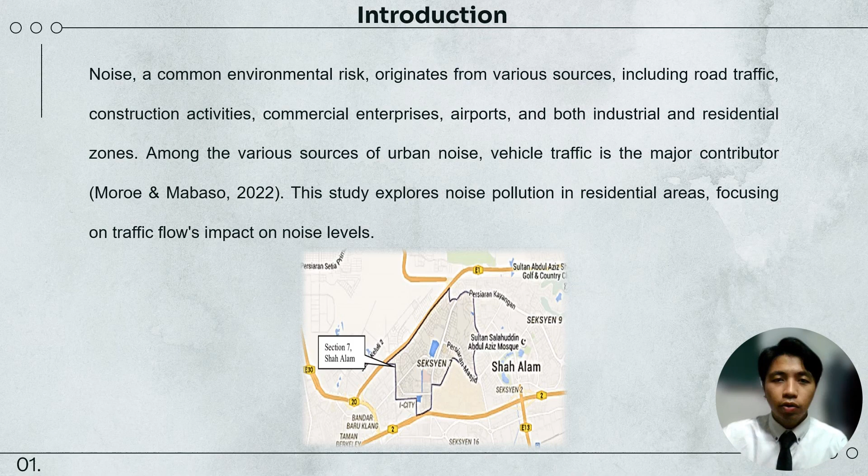This is the problem statement for this study. First, excessive noise in residential areas significantly impacts residents' well-being and quality of life. Road traffic is identified as a major contributor to environmental noise, involving complex factors like engine noise and tire-road interaction.

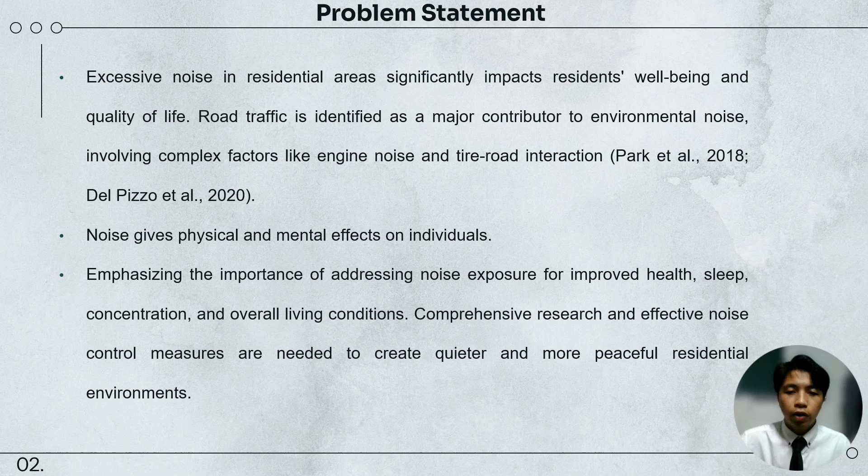Secondly, noise gives physical and mental effects on individuals. And lastly, emphasizing the importance of addressing noise exposures for improved health, sleep, concentration, and overall living conditions. Comprehensive research and effective noise control measures are needed to create quieter and more peaceful residential environments.

These are the objectives to achieve in this study. Firstly, to determine the noise level in residential area Seksyen 7 Shah Alam. Secondly, to identify the traffic volume and traffic composition during peak hours at the selected location. Thirdly, to analyze the relationship between traffic volume and noise level in the residential areas.

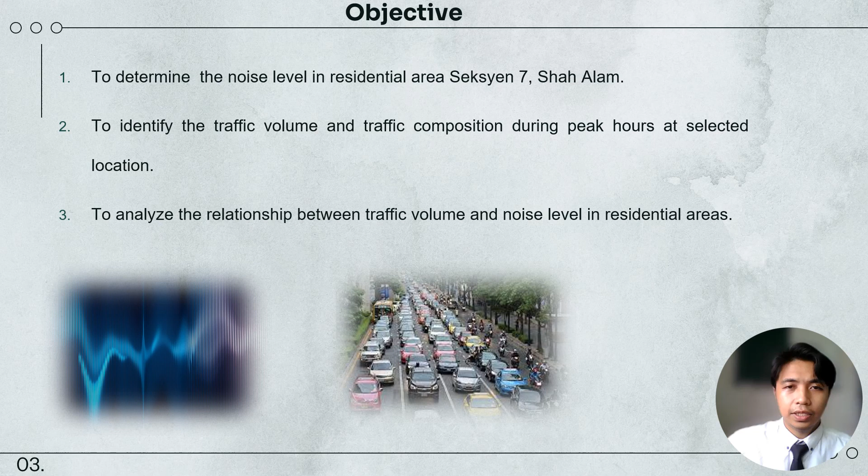There are three crucial research questions for this study, which are: how to determine the noise level in residential area Seksyen 7 Shah Alam? Next, what is the flow of vehicles along the roadside during peak hours? And lastly, is there any relationship between traffic volume and noise levels in the residential areas?

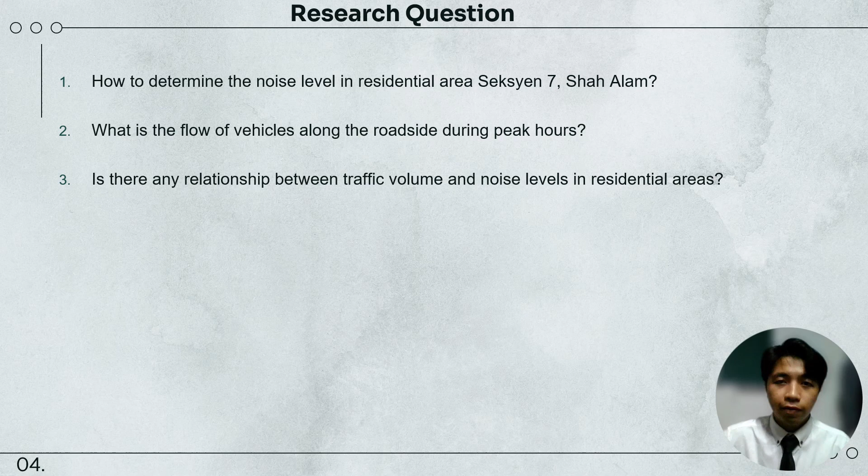These are the literature review for this study. First, Storey 2020 stated that noise is defined as unwanted, unpleasant, or loud sounds. Next, Ma et al. 2020 mentioned that human health and welfare can suffer from psychological effects resulting from noise, including annoyance, sleep disturbances, hearing loss, cognitive impairment, and also mental illnesses.

After that, Hamid et al. 2021 stated that the maximum allowable noise level outside of low-density residential areas at suburban and residential areas shall not exceed 60 decibels at daytime and 55 decibels at nighttime, in accordance with the environmental regulations established by the Malaysian Department of Environment 2007 in order to safeguard the community from this urban noise.

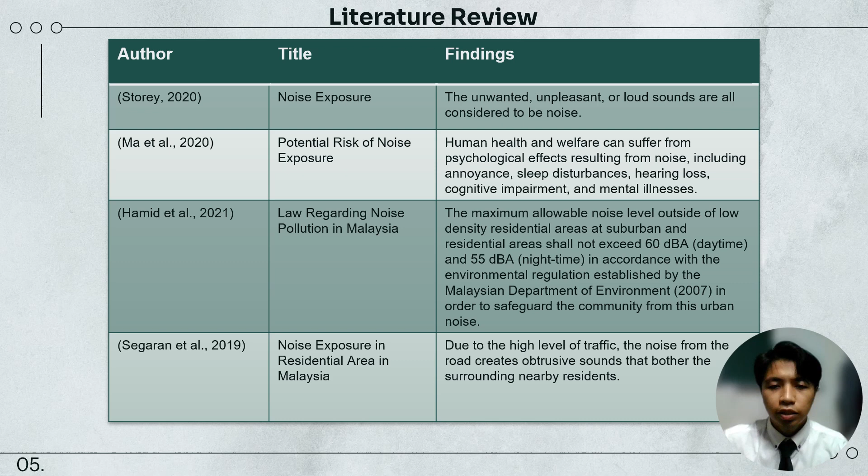And lastly, a study conducted by Segaran et al. 2019 shows that due to the high level of traffic, the noise from the road creates obtrusive sounds that bother the nearby residents. They also mentioned that Malaysia experiences noise pollution issues, much like other growing nations.

This is the table for recommended permissible sound level by receiving land use for existing built-up areas as stated in the Second Schedule of Department of Environment 2019.

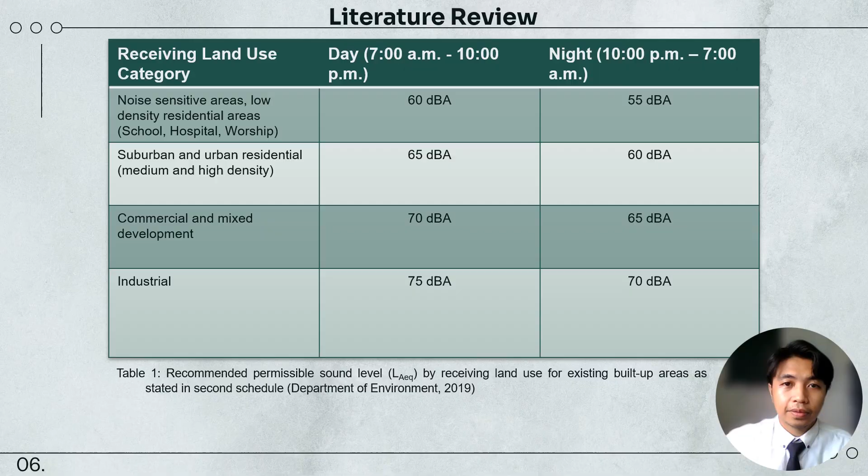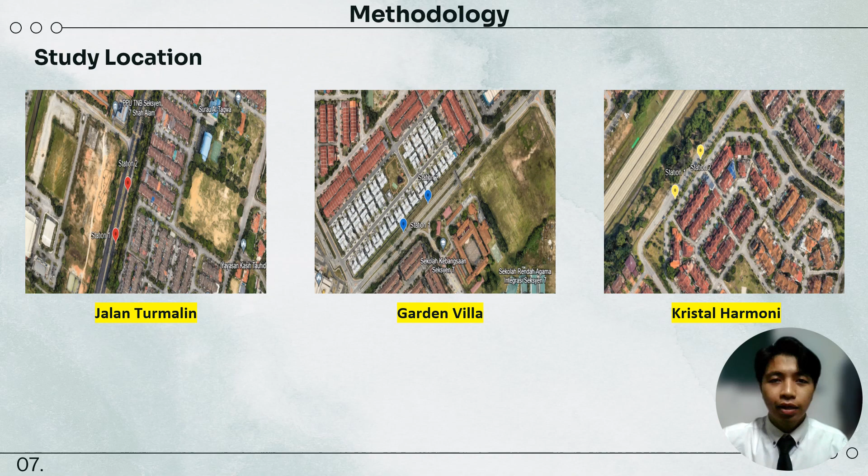As for the methodology, first of all, I chose three different residential areas in Seksyen 7 Shah Alam. First, Jalan Turmalin. Second, Garden Villa. And third, Kristal Harmoni. For the instrumentation, I used the sound level meter to measure the noise level for each location. And for the parameters, I looked at the LAeq, LAS max, and also LAS min.

After that, for the measurement, I did 3 measurement sessions for each location during weekdays, which is early in the morning, during lunch break, and in the evening. Next, I chose 2 stations for each location to effectively identify the noise level. Furthermore, I am using the short-term sampling method for this study in accordance with the Department of Environment. The measurement was running for an hour with 15-minute intervals for each measurement.

And then for the traffic volume, I used count clickers to measure the traffic volume. After that, I used the SPSS software to analyze and examine the relationship between traffic volume and noise level at various times of the day by using the Pearson correlation test. To assess the relationship between traffic volume and noise level in different time periods, a bivariate Pearson's product moment correlation coefficient was calculated and recorded using SPSS.

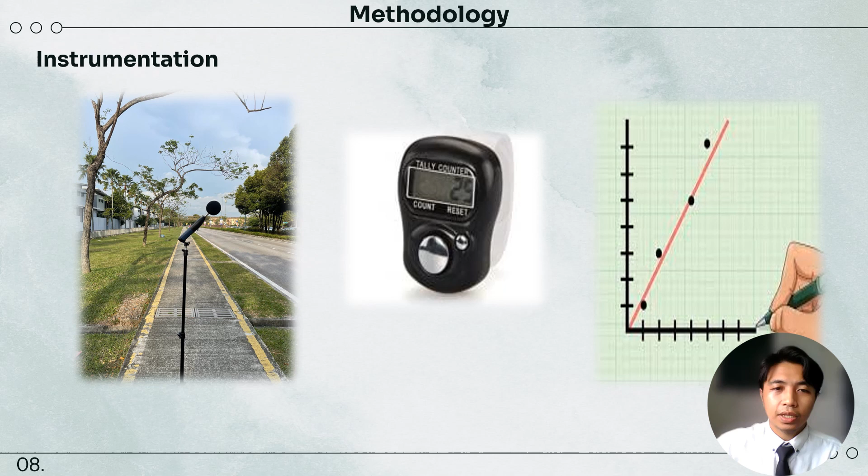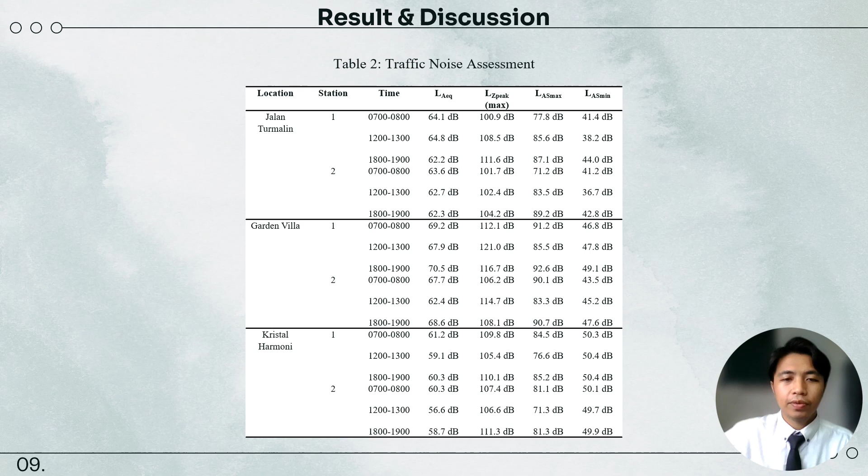For example, the noise levels at Garden Villa were consistently higher than those at Jalan Turmalin and Kristal Harmoni. This is because the road at Garden Villa is a bus road, especially for students, and also there is construction in progress right there, so heavy vehicles are using that road. Additionally, according to Young et al. 2020, noise levels were generally higher during peak traffic hours, particularly during the evening rush hour.

After that, we can see that Kristal Harmoni has the lowest noise level because it is isolated from the main road. Moreover, among the locations, Garden Villa is the only location that exceeds the permissible noise limit set by the Department of Environment under the second schedule, which is 65 decibels. So this is certain to have negative impacts on the residents.

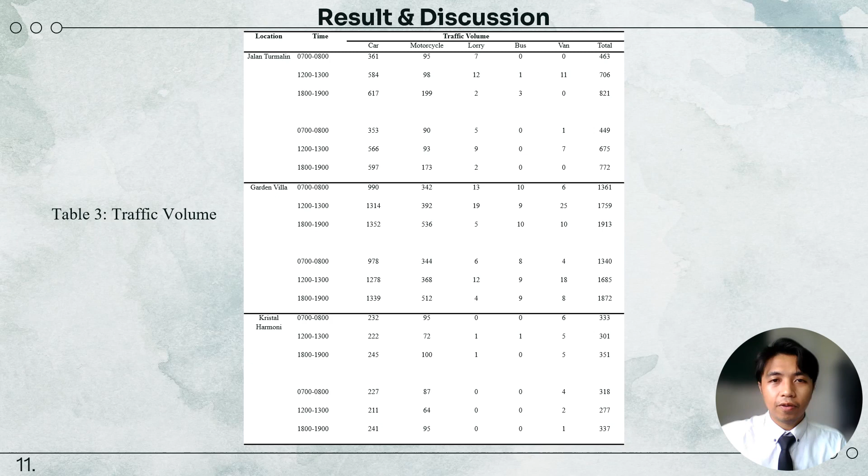For example, Jalan Turmalin had a high proportion of cars and motorcycles, while Garden Villa had a high proportion of vans and lorries. That is why Garden Villa has the highest noise level among those three locations, and Jalan Turmalin is the second highest. This information is important for understanding the sources of noise pollution in different areas and can help inform potential noise mitigation measures.

One potential implication of these results is the need for targeted noise mitigation measures in areas with consistently high noise levels. For example, efforts could be made to reduce traffic volume during peak hours, such as through the implementation of carpooling or public transportation initiatives.

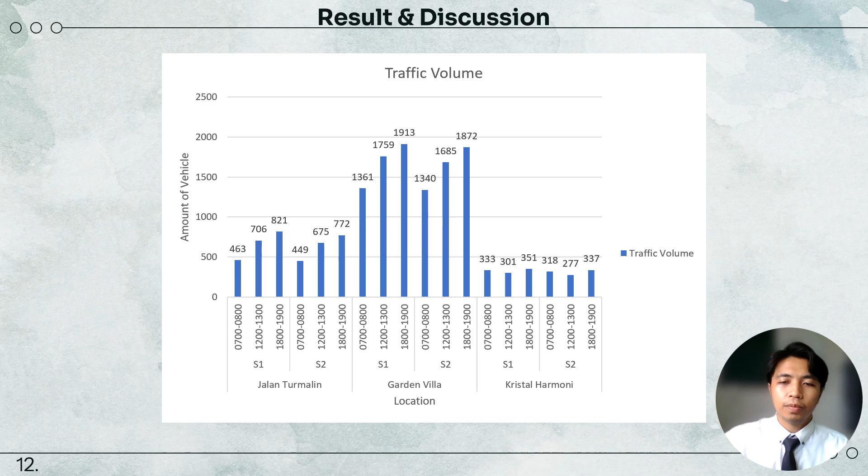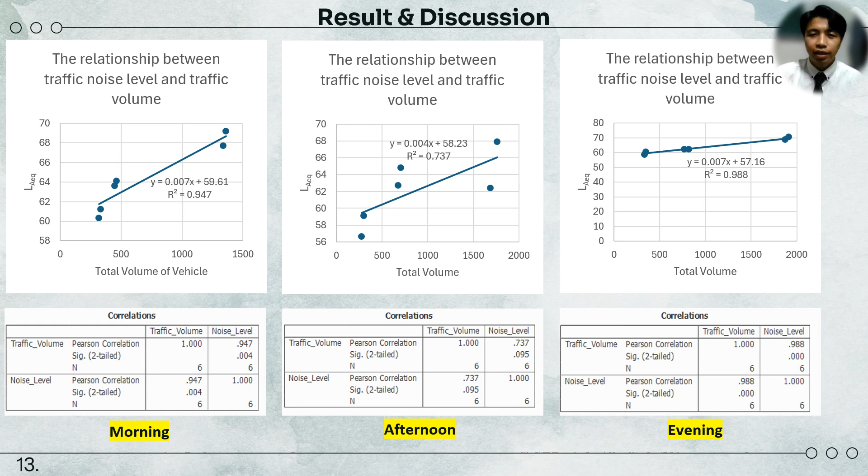So, for the conclusion, the Pearson correlation test reveals significant positive relationships between the two variables at different times of the day. These findings can provide valuable insights into the dynamics of traffic-related noise and can be instrumental in understanding and managing environmental noise pollution.

To sum up everything, the experiment successfully determined the noise level in the residential area, providing valuable data on the acoustic environment in Seksyen 7, Shah Alam. This information contributes to our understanding of the ambient noise in the locality. Next, the assessment of the flow of vehicles along the roadside during peak hours was effectively conducted, offering crucial insights into the traffic patterns in the area. This knowledge is essential for urban planning and traffic management considerations.

Lastly, the investigation into the relationship between traffic volume and noise levels in residential areas yielded meaningful results. Identifying such connections is vital for developing strategies to mitigate noise pollution and enhance the overall quality of life for residents.

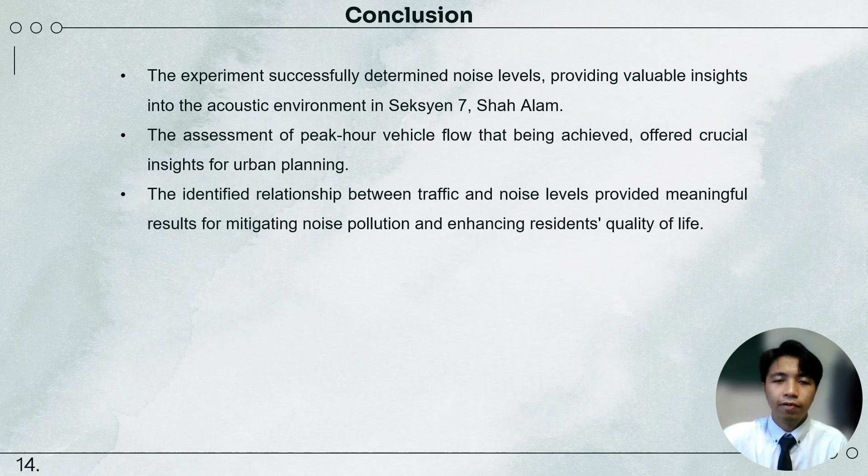Finally, for the recommendations of this study, to mitigate the problem, we can use soundproofing in homes by assessing the level of sound insulation in materials utilized in walls, floors, and various building elements. This empowers the designer to establish the permissible degree of sound insulation achievable through the utilization of specific materials. This process aims to create a comfortable acoustic environment.

Next, by doing traffic management, implementing traffic calming measures such as speed bumps, roundabouts, or traffic islands to reduce vehicle speeds and noise. Lastly, by installing noise barriers like noise walls or fences along busy roads to block and absorb traffic noise.